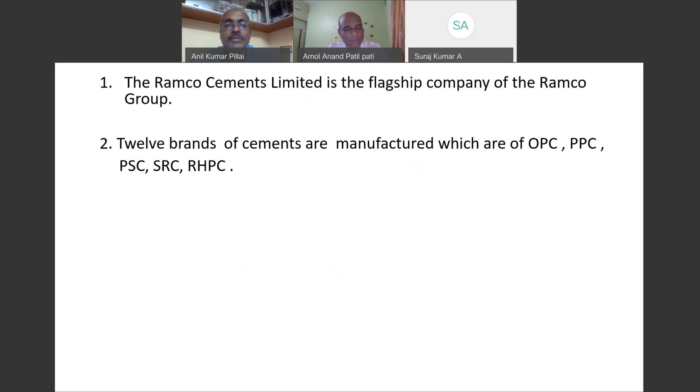We had similar webinars earlier on sustainability with BASF officials as per NBC 2016. About the organization, as all of you know, Ramco Cements Limited is the flagship company of the Ramco Group, and we have 12 brands of cement ranging from ordinary Portland cement, Portland Pozzolana cement, Portland slag cement, SRC, and rapid hardening Portland cement for precast works.

The present capacity of Ramco Cements is 16.5 million tons, and we are expected to touch 20 million tons per annum with the expansion at Kurnool, as well as the new grinding unit coming up in Odisha. We also have one ready mix concrete unit in Chennai and a dry mix plant at Chennai, and we operate one of the largest wind farms in the country. We also have a research center at Chennai, Ramco Research Development Center.

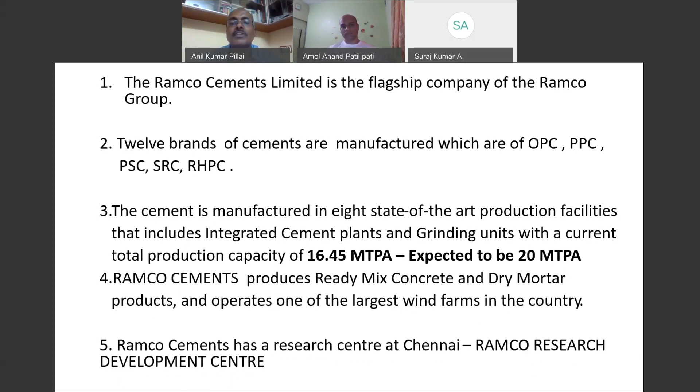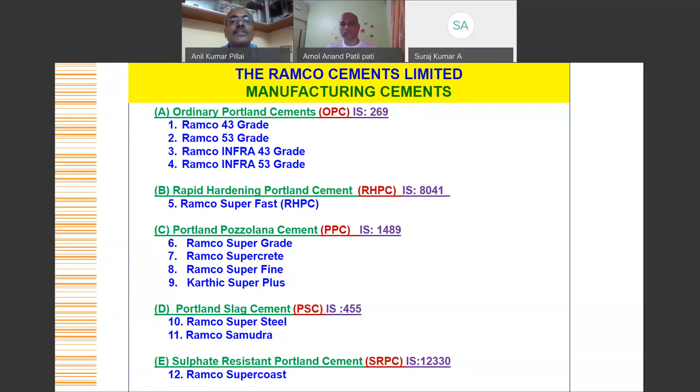So these are the 12 different brands of cement that Ramco has, and a few of the major customers with whom we have very good interactions and who have been using our cement for their major projects. Of course, Larsen & Toubro, who is also executing our plant at Kurnool, as well as a grinding unit in Odisha, and they have various projects ranging from infrastructure to buildings to bridges and all that. So they have also been using our cement for various types of works.

ITD Cementation, of course, in the eastern part of the country, especially near Haldia. We have a couple of projects in the eastern part of the country - Haldia Development Authority, Godrej, and some of the metro projects. Most of the metro projects - Bangalore Metro, Cochin Metro, Delhi Metro - our brand is approved.

This is our research and development center, where we do some works on cement as well as on concrete. Some of the trials that our customers want to do, for example, with reference to their requirement of slump retention strength with the locally available materials - because as all of us know, the locally available materials like sand and aggregate change from place to place, and it can also pose a challenge to the properties of concrete. So we do the concrete trials at our research center for our customers.

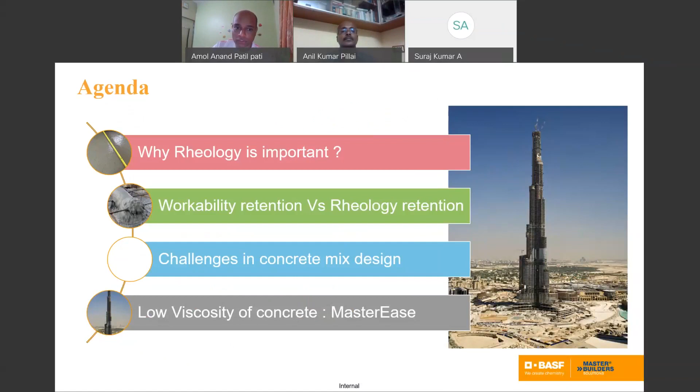So I will take you on a small journey to understand and expand your horizon beyond just concrete mix design. This is our point of discussion or agenda for today. We will go one by one here.

So I will first introduce the word rheology. Why do we need to understand rheology? Rheology is really important in concrete because until we classify concrete in terms of rheology, we always just use the word workability. So workability is actually a part of rheology.

I will try to give some understanding to think beyond concrete technology and take you to fluid mechanics, physics, and applied mechanics. I believe personally that today's concrete technology knowledge is not limited to just the domain of mix design or concrete technology—we have to understand fluid mechanics and applied mechanics.

We have to understand the applied mechanics, and then incorporate all this knowledge to solve our construction problems, specifically for designing concrete and pumping concrete. So what is important here?

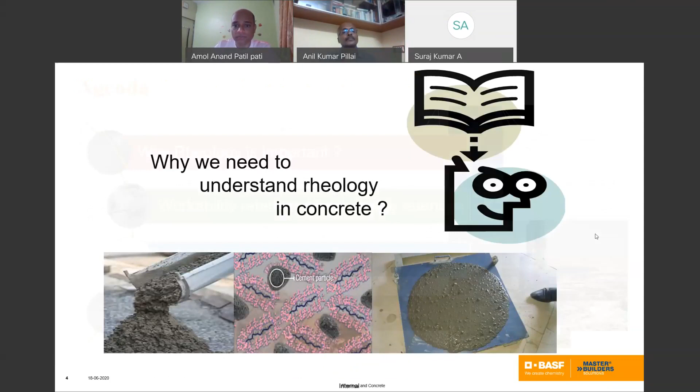When we talk about the concrete mix design domain, as a quality engineer or quality manager, my wish list is that I need stability in the mix. How can I create stability in the mix? So how can I define the stability of a concrete mix design in terms of bleeding and segregation?

My objective for designing the concrete mix is that I want resistance against bleeding, and resistance against segregation in the concrete. That means my concrete is stable.

Next important property is compactability, which is related to relative density. This is how we define concrete technology altogether—that's the left-hand side.

If I move to the right-hand side, once my concrete starts moving or becomes flowable, the most important property is flowability or mobility in the concrete. So how can I define flowability and mobility?

Through the viscosity of the concrete mix, cohesion of the concrete mix, and internal friction between the particles. If I want to demystify these three words: viscosity, yield stress, cohesion, and thixotropy or internal friction—all these words come from fundamental physics, linked to engineering through fluid mechanics background.

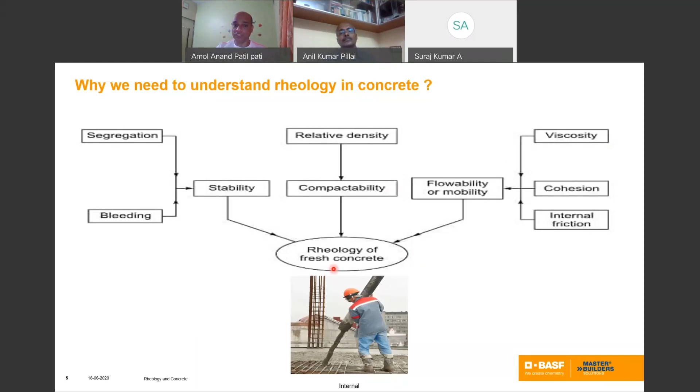Here we are not talking about workability retention. Our objective is how we can maintain rheology throughout the open time of the concrete. This is our objective, and I will show a couple of case studies on why this objective is required.

So first we need to understand two terminologies here: what is rheology retention versus workability retention?

I want to define the workability. So this is the workability retention. Now see the same concrete.

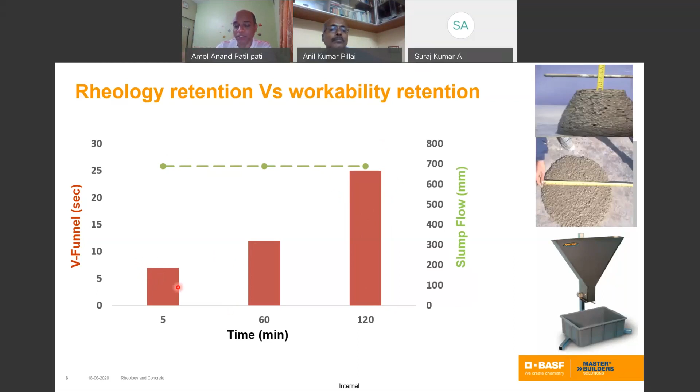Now understand, this is an implication of thixotropy in the concrete. I will explain this to you in the easiest way. Okay, this is our understanding about rheology retention versus workability retention.

Now, the most important attribute in the construction industry - we always define strength versus durability. So here are also two different parameters. When I talk about strength, it is the ability of the concrete to resist the load. And when I talk about durability, it is no more related to strength. Durability is always related to the lifespan of the structure - how my concrete can sustain against weathering actions, chemical attack, abrasion, or any mechanical deterioration.

That performance is important for durability. So strength comes from design parameters, and durability comes from practices or the need of the structure - these are two different parameters. So we don't want to get trapped designing a structure only from strength - wanting to achieve the 28 days compressive strength. Okay, this is one of the parameters, because it comes from the structural design point of view.

Because the structural designer designs the concrete based on the live load, dead load, and wind load combination, and for resisting that load, how much strength of the concrete is important - this is the fundamental factor to arrive at the strength of the concrete.

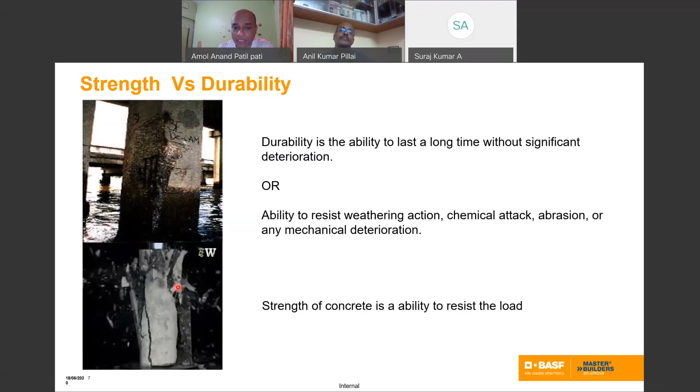Because this is the problem we are facing. This is not even related to it. If you see these photographs, you see the extent of this.

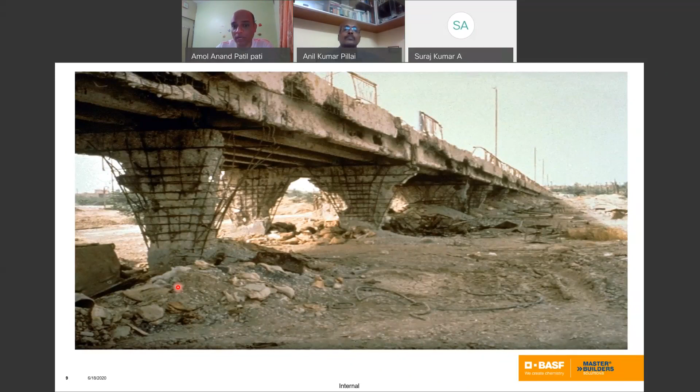It's entire bridges are standing, and because of the deterioration mechanism, because of the corrosions. Is it related to your strength? No, because people are not understanding the proper factors of durability, how much external factor affecting onto the concrete, and what factor of safety is required, what testing is required, what as-built strength of the concrete is required.

This parameter we have to incorporate into all those things. So where we have to main focus nowadays, these are the two parameters: one is the design and second is the practice. Nowadays design is easy because this has very high control. We have the IS guidelines, we have a lot of new nanotechnology materials, we have a hyper range of admixtures available, we have very controlled cement available, we have all supplementary cementitious material available.

So we can design the concrete in a lab in very good, controlled conditions. But when that concrete transfers to the site, what happens? I want to mix all these ingredients - practice is important. I want to transport the concrete - practice is important. I want to place the concrete - practice is important. I want to compact the concrete - practice is important. I want to finish the concrete - practice is important, because the challenge is here.

How many people are involved in this value chain in the practices? Unfortunately or fortunately, people are actually handling the concrete but they are not really aware about the concrete. If I increase the water content in this concrete mix, what will happen? They don't know. If I don't do proper vibration, what happens to the concrete? They don't know, and we don't want to have expectations from those people, because those people are not made for these operations, guys.

We never train them. How will they know? Now I know all these properties of concrete because I am a technical person, so I have expectations from a technical person. But the reality is that on site, the people handling concrete are not technical people. So we are designing very good quality concrete and giving it to people who don't know concrete. This is the challenge for us.

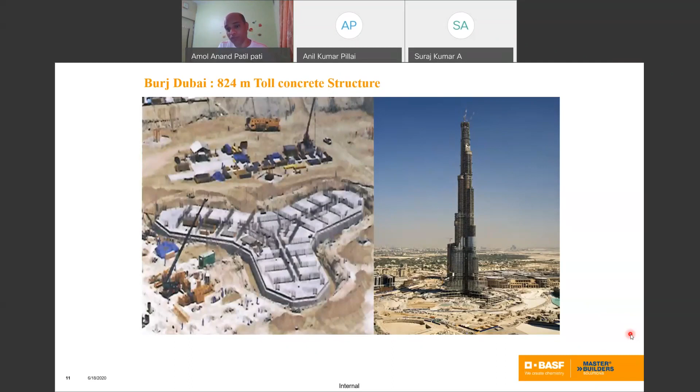So here we are not discussing how we can design the mix grade of the concrete. Anyway, why is this challenging for them? Because when we are designing for high strength concrete, you always go for a very low water cement ratio. You have very low free water into the mix. This is all the challenge.

I will give another example here. So the Burj Khalifa pumped concrete, and there is one more tower, the Kingdom Tower. The height of that tower is 1 kilometer or 1,000 meters. So in this project, we have to pump the concrete higher than the Burj Khalifa, if possible. So challenges keep on increasing day by day. We have to update ourselves.

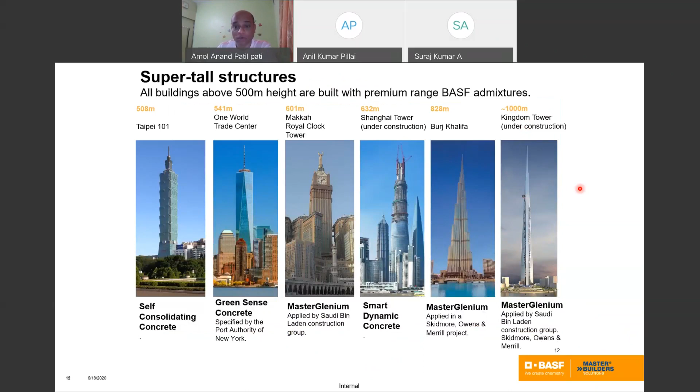We are not talking M95 grade concrete until around 2016 and 2017. So you can say that we are anyway 10 years behind the progress of Japan. But I'm very confident, the way the entire industry is changing - Indian concrete industries are changing, and the demand for high strength concrete is changing.

Because when I started my career, M60 grade concrete was considered very high strength concrete. Nowadays, people are easily talking about M70, M80, or even M100 grade concrete in Mumbai.

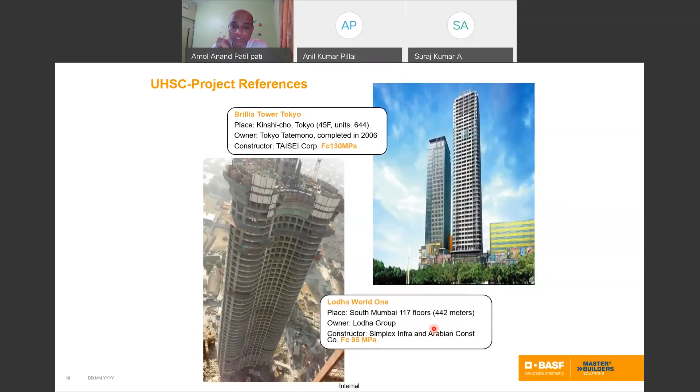So now let me open up my session with the fundamental fluid mechanics properties. How can we measure these fundamental fluid mechanics properties in concrete? This instrument is called an Icar rheometer. So I'm sharing all these facts and figures from the Lodha World site for designing the M95 grade of concrete.

So this is the Icar rheometer. It gives the idea about the yield stress and the plastic viscosity. So we bring this instrument to the sites to understand all these properties.

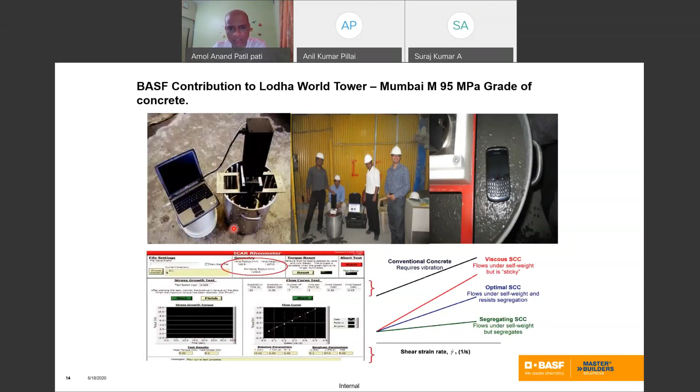Okay, I will explain very briefly, because all of this requires a lot of expertise. This is one of the outputs from this ICAR rheometer. Here, I'm explaining two mix designs, two identical mix designs.

Here, cement content is the same, supplementary cement is the same, water cement ratio is the same. Only the admixture technology is changed, to see how they can change the viscosity of the concrete. If you compare, mix one has a plastic viscosity of 70.8 Pascal-seconds. When I change the admixture technology, I change the entire concept to the low viscosity concrete concept.

When I run this concrete, this is A mix versus B mix. Now when I tested with A mix, it gives me the viscosity of 70.8 Pascal second.

Now the same composition of the mix design, I'm not changing anything, I'm changing only the concept of the designing with the low viscosity concrete. When measuring viscosity with the ICAR rheometer, I changed from 70.8 Pascal second to 36.1 Pascal second, almost a 50% reduction in viscosity. This is the M80, M95 grade of concrete.

If you see here, even this output is coming from the systems. So what I want to mention now is I want to explain how this viscosity brings change into the pumping operation. For example, just in layman's language, we have to try to understand all this concept.

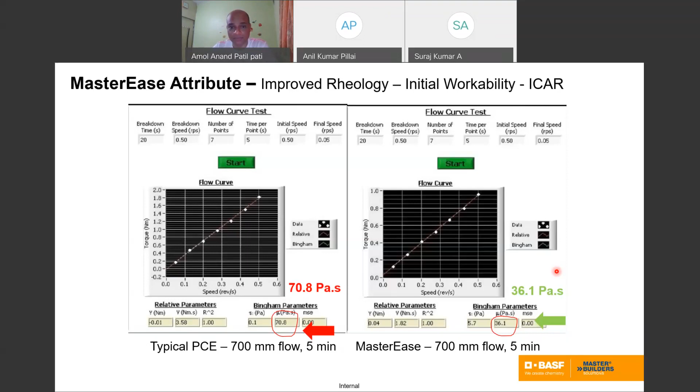We are increasing the cylinder filling. Cylinder filling means we have 2 cylinders in the pump where the piston is actually pulling and pushing the concrete. We increased it by 12%. So pump output increased by 3.5 cubic meter per hour, and batching plant output increased by 5 cubic meter per hour.

This is an intangible benefit into the concrete. So we have to come out from the design criteria of only strength. Today, if I want to contribute into construction, only a technical solution is not good enough. We have to give the management solution along with the technical solutions. This is really the challenge.

Now, to differentiate the bar pressures, before, the viscosity of the concrete was 70.8 Pascal second and at that time the pump was running at 220 bar pressure. When I changed to the low viscosity concept concrete, the pumping pressure reduced to 160 bar. Your fuel consumption depends upon how much bar pressure the pump is taking.

Everything is here. The cost is not only about the reduction of cement, cost is not only about how we can use economic design. The cost is in the practices also, in operations also.

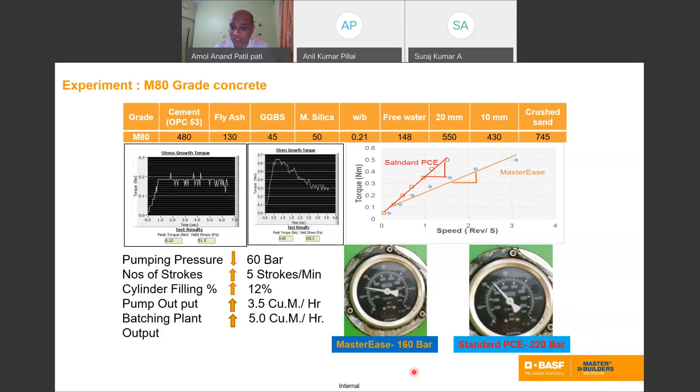Now this is another example, from the Middle Vaitarna project near Mumbai. I hope you understand that Mumbai's municipal water comes from Middle Vaitarna. Middle Vaitarna is hills situated between Thane city and Igatpuri, or we can say Nashik.

Mumbai Municipal Corporation has 3 dams: upper Vaitarna, middle Vaitarna, and lower Vaitarna. All drinking water to Mumbai city is transported from these tanks. So they announced a project to carry the entire water through underground tunnels. This tunnel is more than 30 km long, and the entire package is divided among 6 to 7 companies.

One package was awarded to an Australian tunneling company in JV with Pratibha Industries, an Indian partner. This is almost a 6 km long tunnel, the middle package. The rest of the tunnel packages are already completed.

This is not like a road or railway project where if one package is incomplete we can take a diversion and still use the rest. These are tunnels carrying water - if one package is behind schedule, we cannot open the entire tunnel. So discussions started on how to accelerate the entire work.

The activity left in this tunnel was the lining of the entire 6 km stretch. Now, how did they plan to do the lining of the entire 6 km at the time of tender filing? Let me first explain this to you.

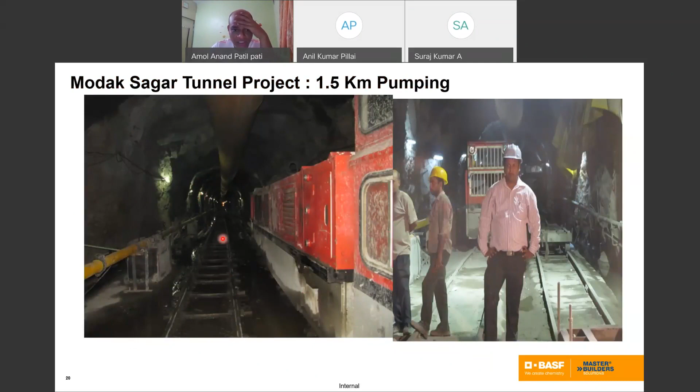They would transport concrete from the transit mixer, lower it by gantry, manually load it into the locomotive, and that locomotive goes inside the tunnel to the respective location for unloading by laborers. Then they pour the concrete manually into the shutters or formwork to complete the lining work. This entire lining work would require almost 7 to 8 months.

Now they didn't have that much time. So when we started discussions with them, we understood the bottleneck in this project: how to transport concrete inside the tunnel, because that was the only time-consuming activity.

We thought - if Burj Khalifa engineers pumped concrete at 620 meters height, could we try pumping it horizontally? Nobody had this experience of how to design concrete for 1 kilometer or 1.5 kilometer pumping. This had to be based on previous experience, while also deriving new terminology and understanding for designing the concrete.

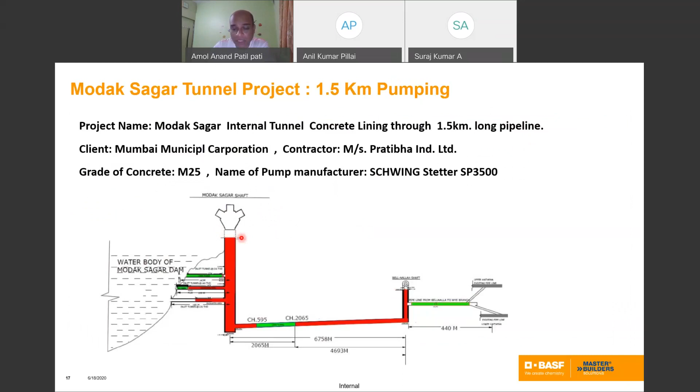Then the actual designing started. The concrete comes from the batching plant by transit mixer to the mouth of the vertical shaft, and is unloaded into vertical pipelines. We arrange the vertical pipeline, which collects the concrete at the bottom into transit mixers.

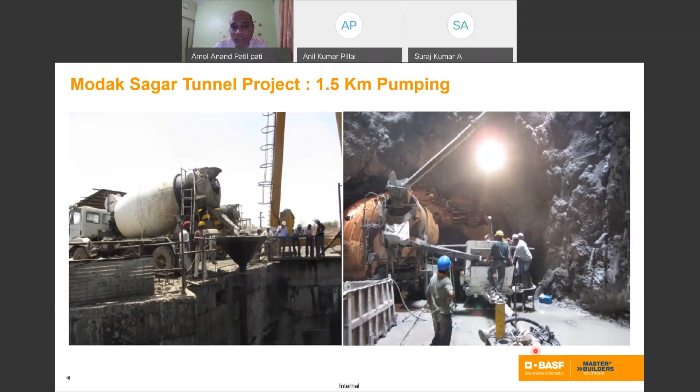We move the transit mixers anti-clockwise, then the concrete flows from the chute to the pump, and the pump pushes the concrete entirely through the pipeline laid along the alignment of the tunnel. In this project, we pumped concrete 1.5 kilometers at maximum length.

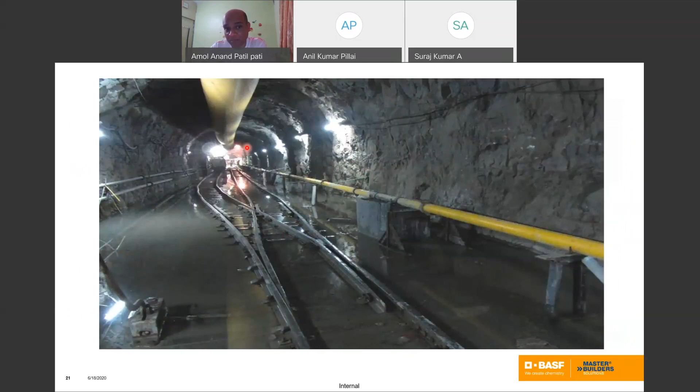Here you see the reinforcement and formwork for this lining work, and we pour the concrete without any vibration. See the finishing - this is what we call smart dynamic concrete, as good as self-compacting concrete, used in this project. This project was completed in 1.5 to 2 months.

The understanding here is we didn't want to track only the cost of designing traditional concrete as given in the documents. If we change the entire concrete design into different dimensions, we have to think about the cost for the entire project.

How much can I save on overheads if that activity is planned for 7 to 8 months versus if the same activity is completed within 1.5 to 2 months? How much can I save on the overhead? Because every day we have to spend money on running the projects. This is a different understanding.

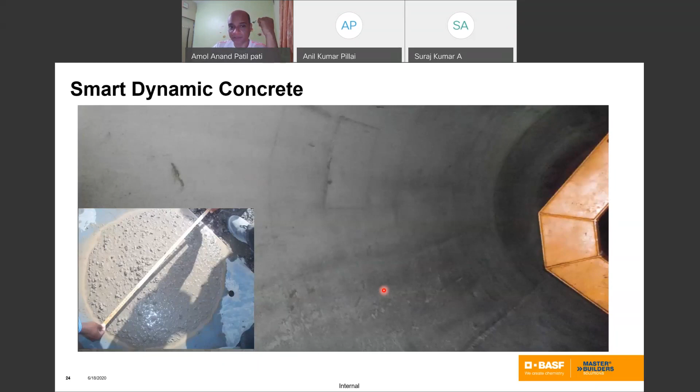That's why I'm always saying that today's only technical solution is not enough. We need to think from the management point of view to arrive at acceptance of new technologies into construction.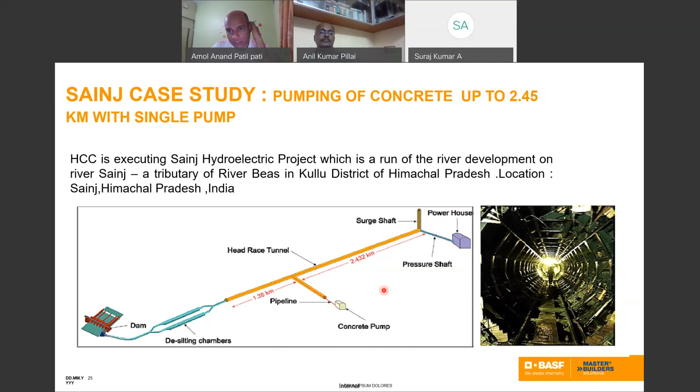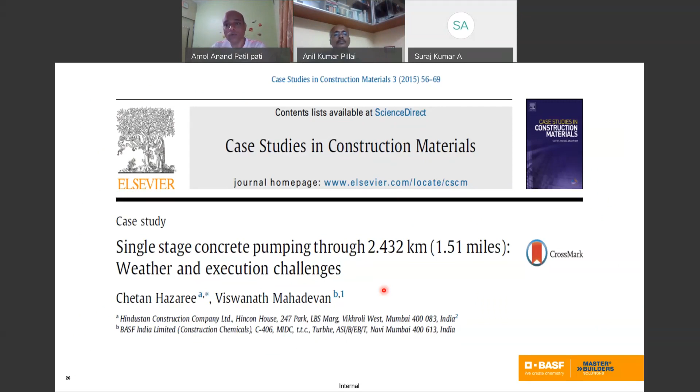This is also the same example as in Himachal Pradesh, where we successfully pumped concrete - one of the world records for horizontal pumping at 2.5 kilometers, with Hindustan Construction Company. If anybody is interested, this case study is already presented in a very recognized magazine, between Hindustan Construction and BASF. You can download it from Google domains and go through it. It gives all the challenges of how we designed the concrete and what challenges we faced, and how we overcame them. This is an interesting case study to read.

Okay, now we understand the concrete requirement for high-rise pumping and for long distance pumping. Now this is a different domain.

I will say that Japan is the father of invention of self-compacting concrete. Professor Okamura, from Tokyo University, is the first person who actually did research on the self-compacting concrete concept, and later all the European countries accepted it, and various people started working on self-compacting concrete. This is the first application of self-compacting concrete used in Japan.

That's why I chose this case study, and our BASF Japanese colleagues worked on this project, so I always feel proud to share this with everyone.

So in this project, this is a suspension bridge. In that suspension bridge, people may think the construction of the pylon is most critical, but if you see here, the entire load they want to transport into the anchor blocks. This is most important because here they have uplift pressure, because all the suspension cables on both sides, from upside and downside of the bridge, are anchoring into this anchor block.

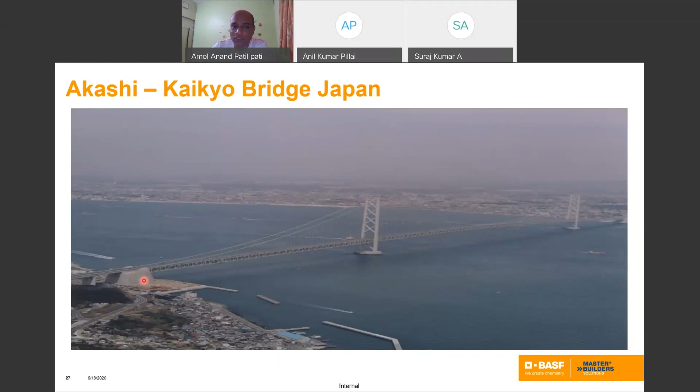Now most important here - this is an aerial view, so it looks smaller, but this is like a mountain. One anchor block has more than 2 lakh cubic meters of concrete. I show here the dimensions: 80 meter length, 63 meter bottom width, and height is 38 meters. If you say my floor-to-floor height is 3 meters, then it's almost 12 to 13 story building. Now you can imagine the quantum of work for the concreting.

So this one block has more than 2 lakh cubic meters of concrete, and you have to consider this is 4 blocks. If you see here, the congestion of reinforcement into this anchor block for this bridge - the entire anchor block, 2 lakh cubic meter concrete for a single anchor, was designed with 40mm size aggregate, because they wanted to minimize the heat of hydration. So they went for the maximum size.

Even designing for MSA 40mm size aggregate, they designed it successfully as self-compacting concrete. This is a real challenge. I am not talking about the challenge of self-compacting concrete design for 10mm or 20mm size aggregate - they designed self-compacting concrete for 40mm size aggregate.

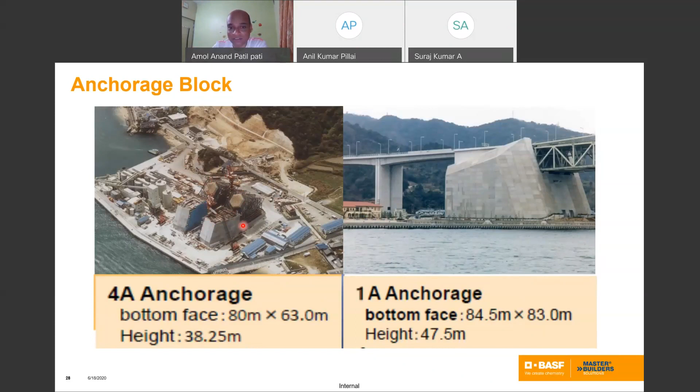This is a factor - total concrete volume is 6 lakh cubic meters. They designed with maximum 40mm size aggregate, and maximum pumping distance is 200 meters. So how did they design the entire process from the batching plant to the anchor block? There is no human intervention - directly pump from the batching plant and deliver into the anchor block.

So why this is most important is that when I'm talking about this 40mm challenge - if I want to accept 40mm size aggregate and design self-compacting concrete, it's not only concrete technology we have to use to design the concrete. This is fluid mechanics, this is applied mechanics, and then concrete technology for such a solution.

Because it is very easy if somebody says I want to design self-compacting concrete with MSA 10mm or MSA 20mm, but designing with MSA 40mm is altogether a different challenge.

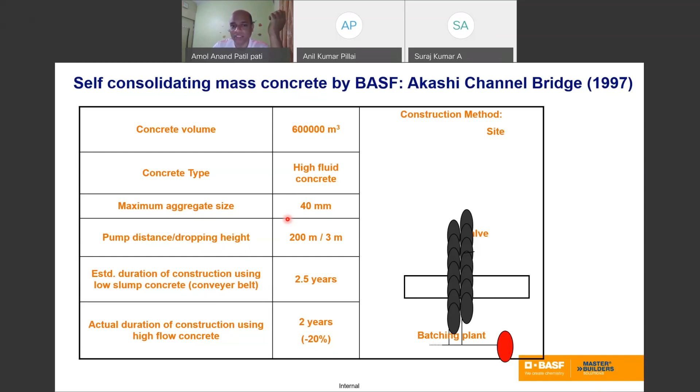Still, we have not touched the design part. What are the challenges in the design? We will see in different cases.

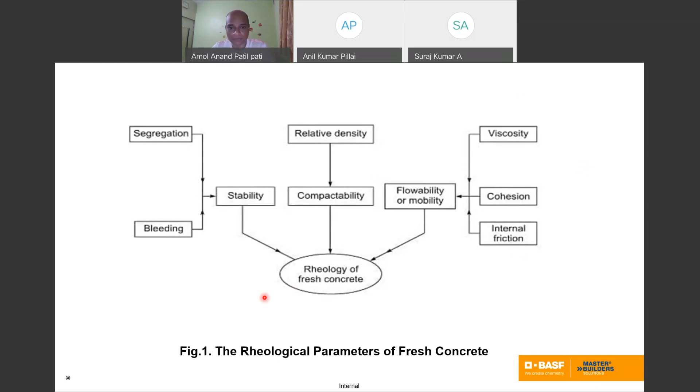So now I come back to durability. I hope you guys are now very clear about the strength and durability performance factors. We are not talking about designing concrete only to achieve strength. My more focus is how I can help the construction people make their life easy. This is my challenge for understanding rheology, because rheology plays the most important role in practice - how to mix, transport, pump, place, and finish the concrete. This is all operational challenges at the day-to-day sites. Design is not really a challenge for us.

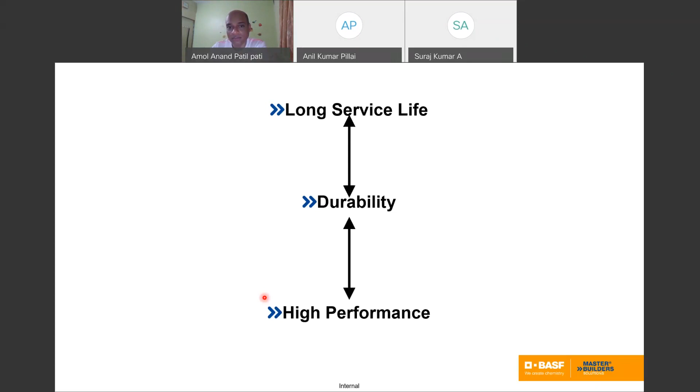So which factors come into durability - obviously permeability, diffusion, corrosion, resistivity. I'm not putting much time on this because I want to take it to a different domain.

If I want to talk more about high performance concrete and design, the first key parameter is I want to use supplementary cementitious material and try to keep the water cement ratio as low as possible, because these are the two important levers for designing high performance concrete in terms of durability.

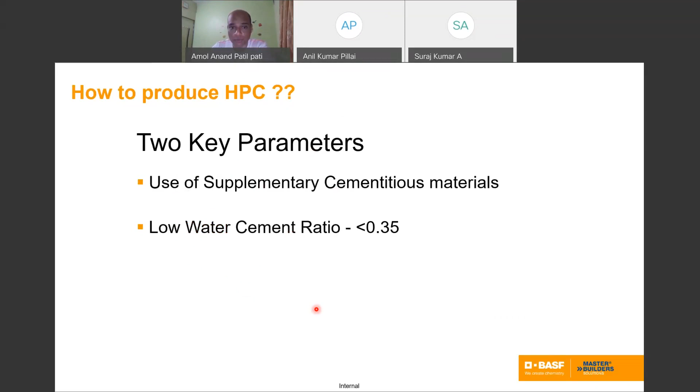Now, we have different challenges, but I cannot go over everything because you guys will understand. I will give one very comprehensive understanding about how binders or supplementary cementitious materials play a role in rheology and the entire project dynamics.

What is the definition of the pumpable slump? If I refer to IS 456, the slump is 125 plus or minus 20 is pumpable slump. Sometimes you can use tremie concrete - the pumpable slump for tremie is 160 plus or minus 20 mm. This is a total guideline.

But when people are drafting all these guidelines, they have some basic understanding about where and in which situation people are using this concrete. They don't understand how you can build the concrete onto the site with different types of formwork.

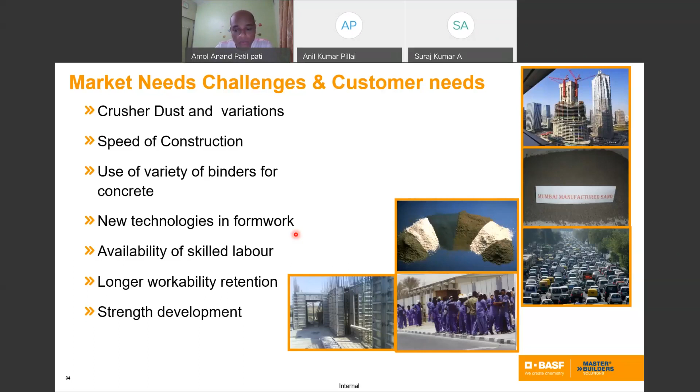For example, this is modular formwork. Everybody knows that the height of the formwork in a residential building is around 3 meters, 3.2 meters. The thickness of the wall ranges from 120 mm to 150 mm. And this is because these are all load bearing walls - they are carrying the loads. There is no slab and column and beam structure; all walls are reinforced concrete walls.

So they have reinforcement in all these walls. If I assume the thickness of the wall is 150 mm, and they have a 10 mm or 12 mm bar at the middle, we don't have much open cover. Now the challenge is there - my understanding is that I'm pouring the concrete from the top, almost 3 meter height, and that concrete should flow below the window sill level, each and every corner of this formwork. This is my understanding, and my specification says it's pumpable concrete. Then how is all this possible?

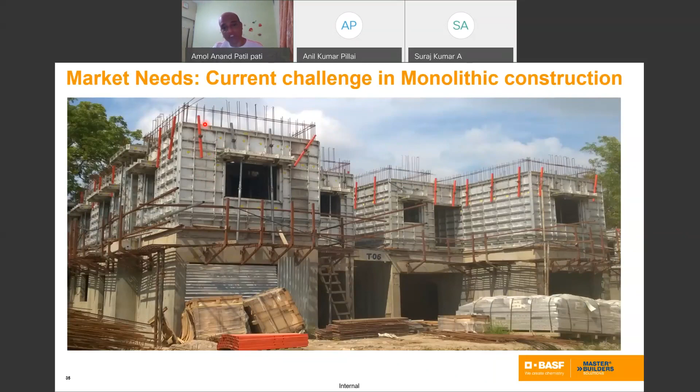When we refer to pumpable concrete, that time people might not say you have to pour the concrete 3 meter height. No - we have to place the concrete with maximum free fall, as per IS guidelines, 1.5 meter. The concrete lift should not be more than 1.2 meter. The one lift of concrete should not be more than 300 mm. This is all the guideline provision available, and that provision is with respect to construction practices. If you change the construction practice, you have to change the specification. That is the biggest challenge. What happens otherwise?

If you see here, almost one-third portion of this wall at the bottom has high honeycombs. People go for repair mortars or polymer cement sand to patch up these things. Most importantly, in such construction, people are not going for plastering. So they're hiding their mistakes - hiding our mistakes in the form of plastering is not possible because neither the developer nor contractor will go for the additional cost of plastering.

When you are doing the modular form, you just go for a consistency of paste with thickness more than 2 to 3 mm, and then go for oil painting or decorative painting for decoration purposes. This is a general project understanding for this modular formwork. When people use it, they create the problem.

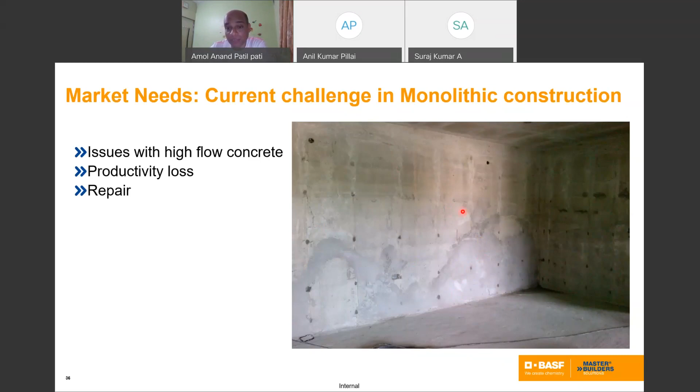I will show some of the process - see here how they are doing the placing. I feel really bad to show all these photographs, but why am I sharing all this? Because this is happening. Now, in this modular formwork, we will go and rectify all this work. Then we are chasing waterproofing and leakages, and this becomes the entire life of the project.

Why is this happening? Because there is a gap between the specification and the construction practices. People are adamant against changing the specification - they say our specification document, our tender document says this, this is complex now, we don't want to use the smart dynamic concept. But that means not changing the overall system. If you are adopting a new formwork system, you have to change the specification concept also, because your methodology entirely changes. This is the gap between design and practices, and we have to understand all this.

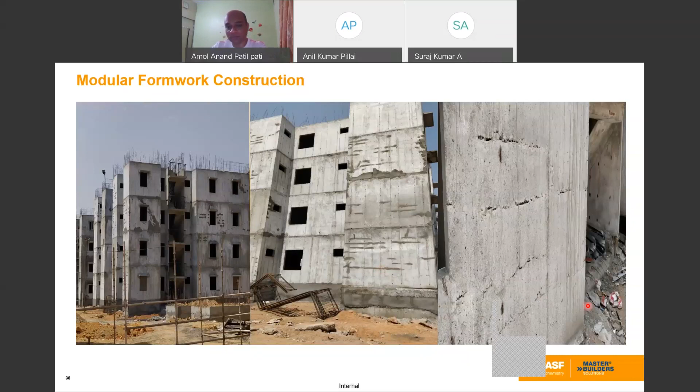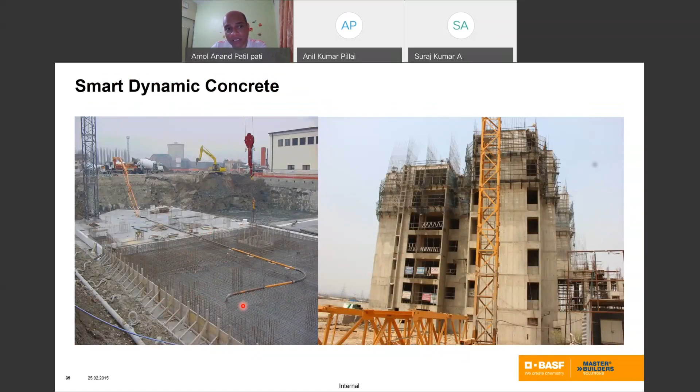It's smart dynamic concrete, or self-compacting concrete. So this is now the transition - this is your traditional vibrated concrete versus the self-consolidated or smart dynamic concrete.

When I say this is your plastic stage concrete, when you put concrete into the plastic stage, your fundamental properties of concrete technology are still valid. When I'm changing concrete from the plastic stage to the fluid stage - flowable concrete - fluid mechanics comes into the picture. I need to understand, analyze, and design the concrete based on fundamental fluid mechanics properties.

In this webinar, I am not covering all this - what is the fundamental property, what is the approach for designing concrete in terms of fluid mechanics - all those things, because these are all different topics for the design concept.

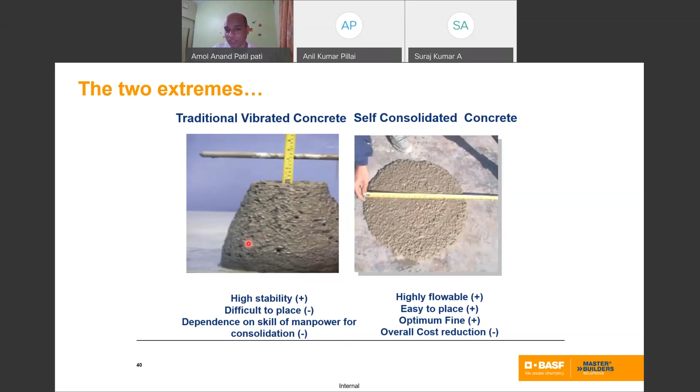But my objective here is to bring to your attention that we have to think differently. We cannot understand concrete just by measuring the slump of the concrete. This is only one of the properties of the concrete, and in fact concrete is in a plastic stage. So how can we measure the different properties of the concrete?

So fluidity, passing ability of the concrete, and segregation resistance of the concrete - this is well documented in the EFNARC guideline for self-compacting concrete, and that helps us understand the rheology of the concrete. I am mentioning this because we have to go to that basic understanding of how I can measure the rheology of the concrete.

First, I will demonstrate rheology measurement with the help of the ICAR rheometer. What is the challenge with ICAR rheometers, and why we are not using them extensively - we will see all those things. At this moment, you just understand how I can measure the rheology properties of the concrete, in terms of fluidity, passing ability, and stability or segregation resistance.

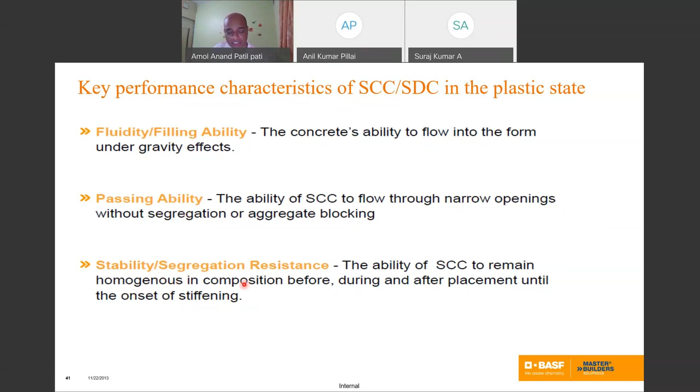So everybody knows we have three instrumentation methods. One is the flow table, second is the L-box stage, and different others. So this classification is given by the EFNARC guideline.

Most important is design and practices. Now, design says we have to design the concrete for M30 grade. This is a simple definition from the design point of view. If the designer's mind is only focused on compressive strength, his job is only to ensure the concrete achieves the 28-day compressive strength of 30 MPa. Now my question is here.

Suppose in my project I have two situations. First, I want to use M30 grade of concrete into the slab. In the same project, I want to use M30 grade of concrete into the column. Now understand how the dynamics is changing.

When I say I want to use M30 grade of concrete into the slab, what is the thickness of the slab? Maximum 200mm or 250mm. So that thickness I can assume as the height of the concrete in that formula for M30 grade. Now M30 grade is the same in the column, but what is the height of the concrete in the column? It's 3 meters.

So in the slab section, my height of concrete is 250mm. In the column section or wall section, same grade of concrete, but the height of the column is 3 meters, 3.2 meters. Now a technical person or designer says both concretes are the same because slab has M30 grade concrete and column has M30 grade concrete.

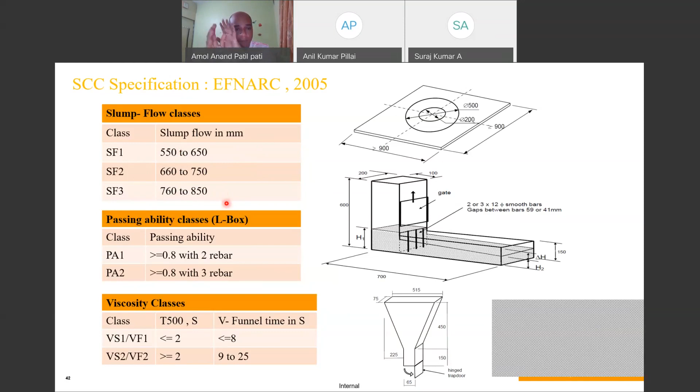That's why if you refer to the EFNARC guide, they give different classes of flows: SF1, SF2, SF3. SF1 flow is 550 to 650, SF2 is 660 to 750, SF3 is 760 to 850. So you have M30 grade concrete, but they have different slump flows. I'm not going into all this detail, but we should know all these things.

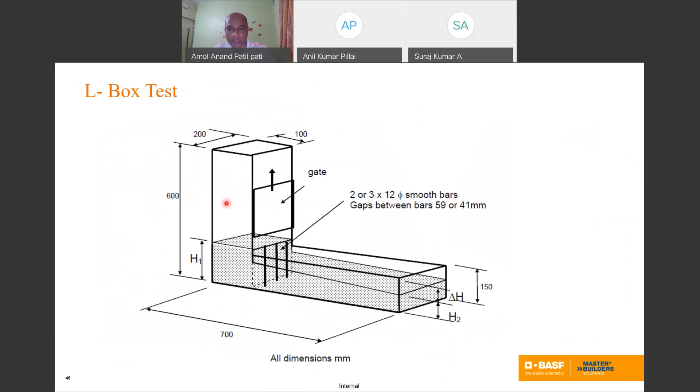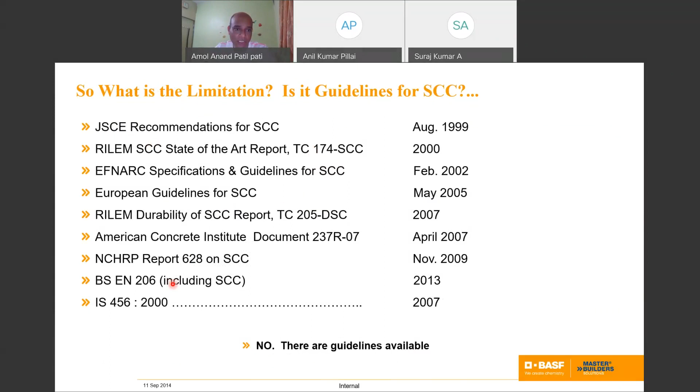This is the annex from IS 10262. So just go through them, they capture all these slump flow classes, J-ring test, V-funnel test, sieve resistance test. This is the most authentic document we have to design self-compacting concrete.

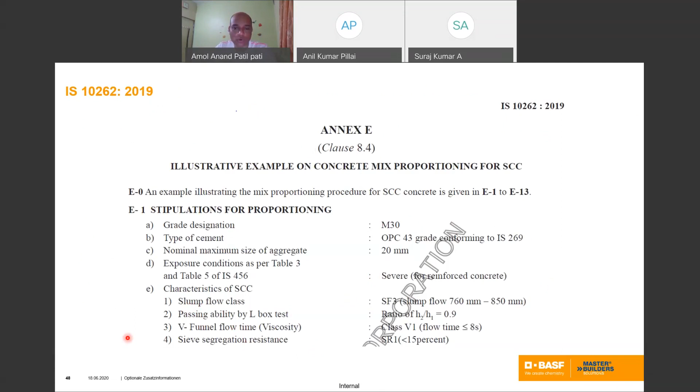Earlier we had difficulties with all this documentation, because government people are asking what the compliances from the IS code are and all those things. So I just touched upon smart dynamic concrete and how we can differentiate it from traditional vibrated concrete and self-compacting concrete.

If you go to the philosophy of self-compacting concrete using the EFNARC guideline, they say if I want to design self-compacting concrete, the minimum fines into the concrete is 550 to 650 kg per cubic meter. Suppose I want to design M20 or M30 grade concrete, then I have to put extra fines for designing M20 and M30. That is not the economical way. This is over-engineering. That's why people are not happy to use self-compacting property into lower grade or day-to-day grade of concrete.

M20 and M30 is, I can say, 99% of the country's volume, India's volume is M20 and M30. We are hardly using 1% high strength concrete. It's very easy if somebody says I want to design self-compacting concrete at M60 and M70, because M60 and M70 already have a high amount of fines, around 550 or 600 kg per cubic meter. It's very easy to convert it into self-compacting concrete.

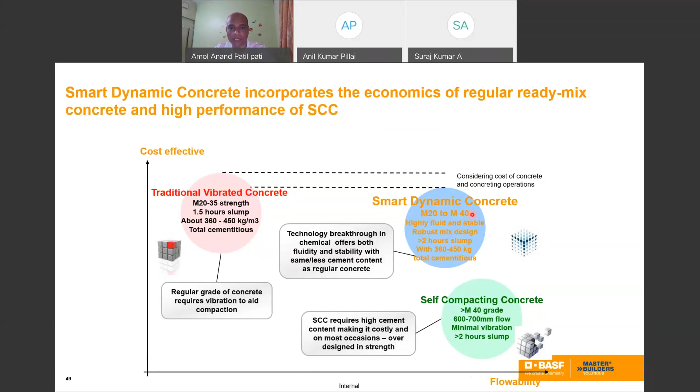So the smart dynamic concrete concept we are designing is for how we can design self-compacting concrete property into day-to-day grade of concrete in an economical way. For this context, I'm just stopping here for smart dynamic concrete. I have to position this in your mind because I don't want any doubt under your mind.

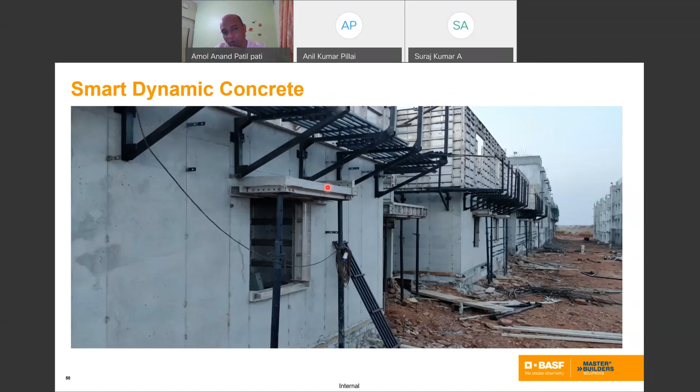See here the finishing for this all this stone. This is the modular formwork. You just remove the formwork, go for the finishing and fill this formwork holes, and just go for the distempers or the decorative painting and the oil painting, and just hand over to the customers.

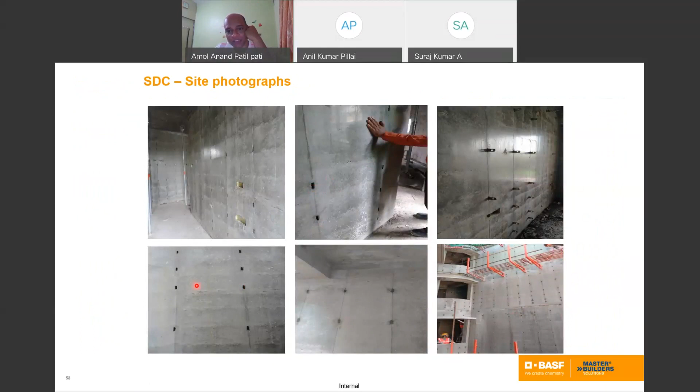Now, this is one more attribute that people ask about. If I want to measure the rheology, is ICAR rheometer the only way possible to measure the rheology? No, in the simplest way also we can measure the rheology of the concrete. How can we measure the rheology of the concrete?

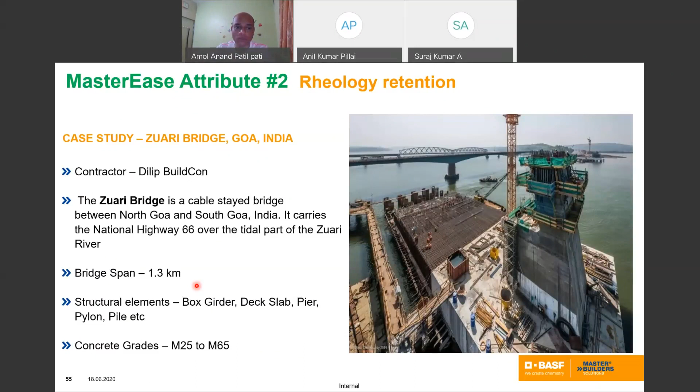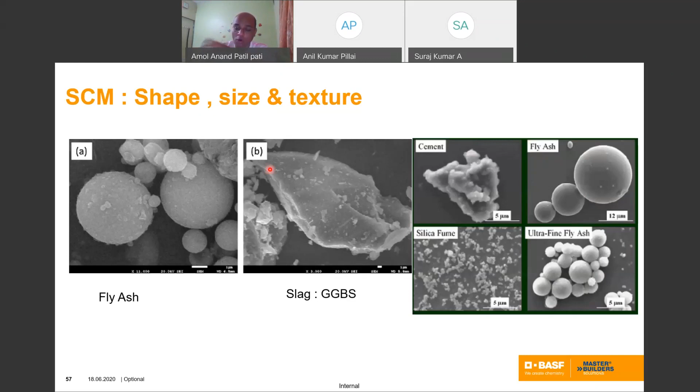Vice versa, if you are using fly ash, they create a ball bearing influence. So fly ash does water reduction into the mix, or increases workability, increases slump, increases flow into the concrete mix. But when using a high amount of fly ash, it becomes sticky because of the inherent properties of fly ash - the size, shape, and texture of the particles. So all these issues arise in these projects when designing with high replacement of cement.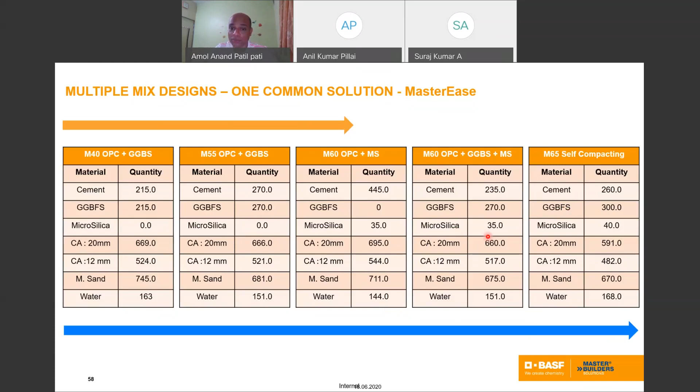Again, basic challenges that they have - this is a mega infrastructure project. In that mega infrastructure project, they have different kinds of mix design, starting from M40 to M60 or M65. So they want to use only one admixture for the entire mix design. If you see here, this is almost 50-50 replacement of cement and GGBS. In this mix, they are using cement and microsilica. Third mix: OPC with GGBS, cement, GGBS, and microsilica. So how is it possible to accommodate all these supplementary cementitious materials into the mix without changing the admixture? So this is again the challenge.

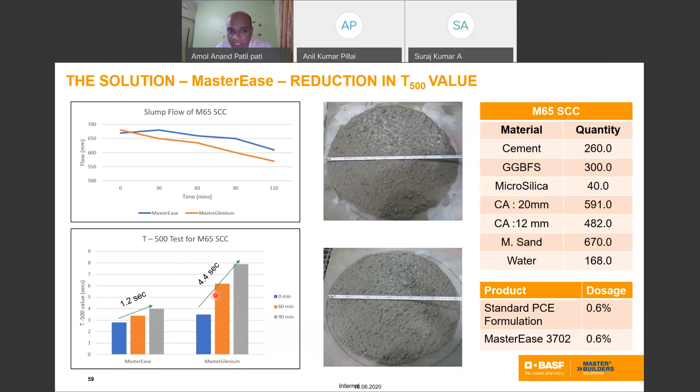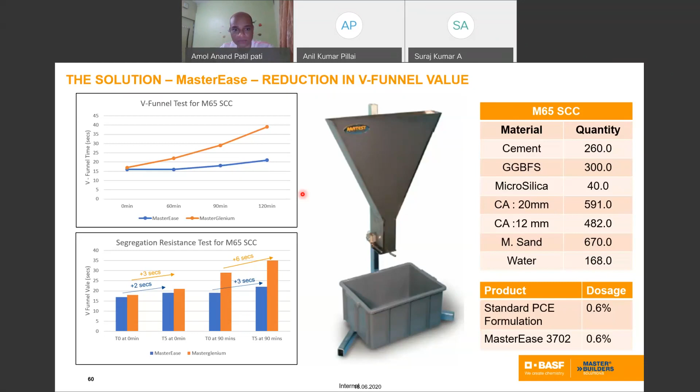So this is the way you can even measure the rheology onto the construction site. It is not necessary to purchase the ICAR rheometer every time, because the challenge is the ICAR rheometer does not give direct indication, and you cannot use that output directly into changing the mix design. This requires high expertise to understand all this output and how that output can be incorporated to change the mix design. So this is the way we have the option to modify the rheology with the MasterEase.

So you don't want to track only from this compressive strength attainment and think my job is over. Practice today is most important: to attend to the speed, technology, and complexities in all these projects.

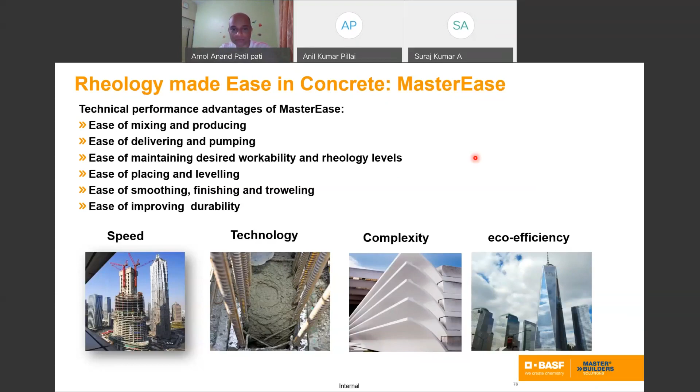My objective here is that I'm not going in depth about rheology myself. I want to bring people to a level where they should understand what rheology is and how we can think differently about designing concrete. These are different domains, and I must pass on these things so that at least we can start understanding all these concepts in different ways, interact with different experts in the industry, and gather all this knowledge.